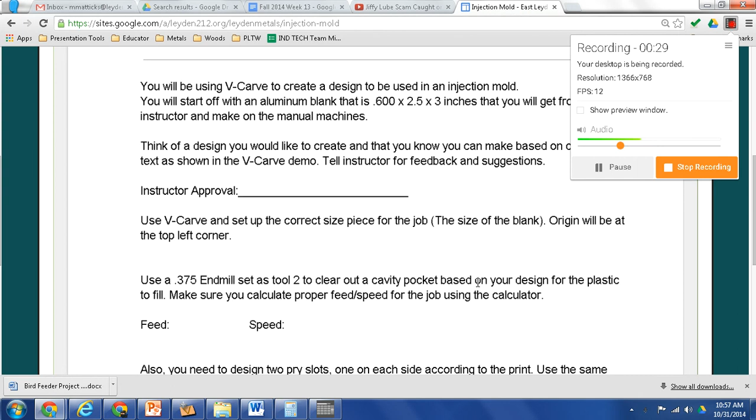And so I'm just going to show you how to create that real quick. And so if I come over to V-Carve and I have my blank set up, basically what I want to do is I want to create a pocket somewhere in the middle. Now keep in mind, if you think about where we're coming from here and we take a look at the actual final product, our pocket can't go all the way to the edges because we're going to have a couple of holes put in through there. So it's got to stay within this area, kind of in the center.

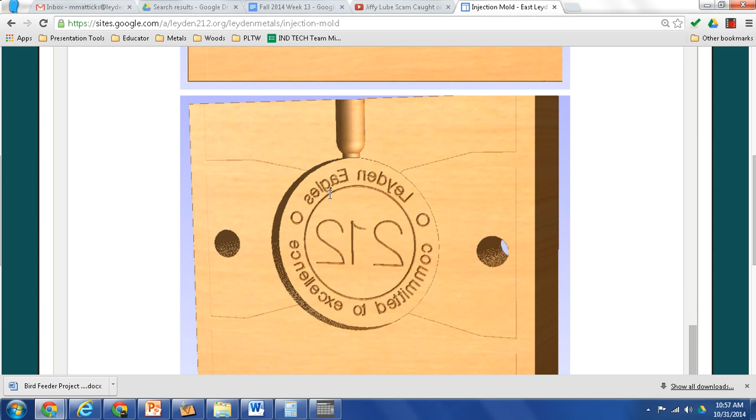So same thing here, you can kind of see that I have these holes. So I could have expanded a little bit more, but I have to stay clear of those by a decent amount. And so over here, basically it's telling me, okay, I want to make that pocket. So when I go into V-Carve, what I want to do is I want to give it a shape. And so let's say I want to make a rectangular pocket. Okay, so I'm going to draw a rectangle.

And right now it's going to ask me for an anchor point, meaning where is this rectangle going to start from? And then you can put an X and Y location. You can put a radius corner on there. What I'm mostly concerned about at this point is the size. So I have a 3 inch wide piece. So maybe my cavity is going to be 2.5. That'll give me 1/2 inch on either side. And I can play around with that a little bit later.

Okay, so I have 2.5, and then maybe my height is going to be only about 1.75 because I want to have room for that sprue and gate as well as some material on both sides. So I create that. Now, right now it's square. What you have to keep in mind is with a round cutter, like an end mill, these are never going to be square. It's always going to be radiused. And so if you want to just make it radiused, you can actually do radiused external right from here. And you can set it as a 1/4 inch radius.

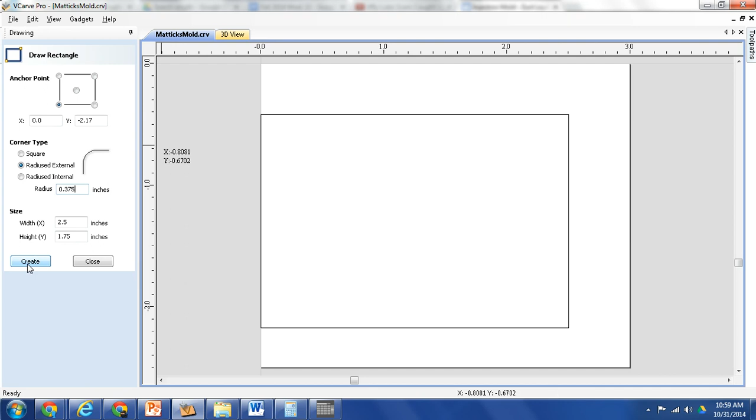In this case, since we're using a 3/8 end mill, you can't really do a 1/4 inch. You're going to do a .375 radius. So let's say that's what I wanted. So now it created another one on top of it. So I can just select that one. And then I just hit the delete button to get rid of anything, not the backspace, but delete. So now I have this shape right here. But what I really want is this shape to be centered in my mold.

And now I can double click it and you'll notice I can move it around. If I want to put it here, I can put it down here. I could actually change the size of it. So if I wanted it this big, like say I realize that it's a little too big or too small, I can always drag it to an appropriate size right there. If you just go over here to undo, you can always go back, you can go forward, you can edit undo, or if you're like me, I like to just do Control Z if I want to undo.

But for right now, maybe I want to keep this size right about here. Okay, so the shape of my pocket for my cavity is going to be like this. And so that's going to give me a little bit of room on this side for a hole, and then some gate and sprue up here, and then just some material left over here. If I want, I can make it a little bit longer. But now let's say I want this thing centered right in my mold. Okay, so I come over here and I come to my Align Objects menu. Really what you want to look at is I have a bunch of different operations I can do.

These are my file operations up here, like new, save, open, import an image, things like that. My control, my view, I can zoom, zoom out, zoom in. I can pan it around. Okay, over here I can create shapes. They're called vectors. Anything we carve has to be what's called a vector. I can edit my vector.

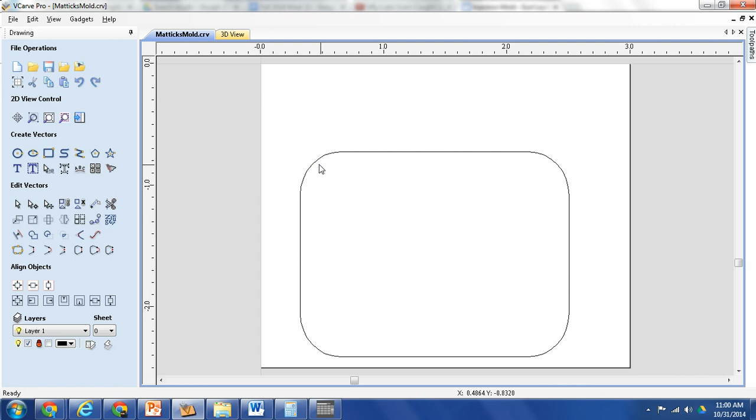So once I have it created, let's say I wanted to highlight this, I would come over here and highlight. All right, I could select it. I'll explain more of these more in depth a little bit later. But really what I want to do is align my object. And so I'm going to go ahead and I'm going to center in the material.

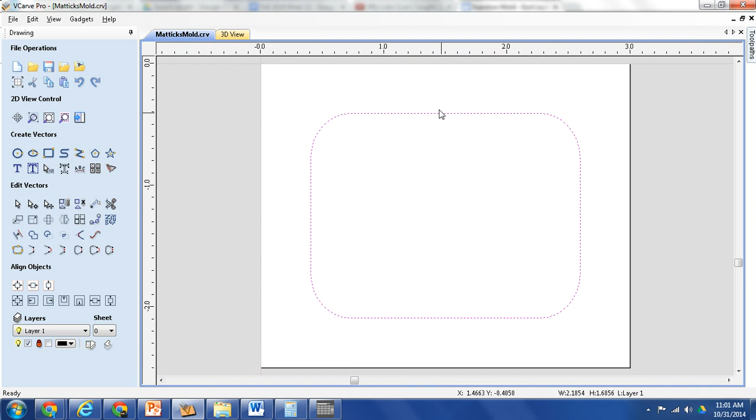Now that's okay, except I got to think about the overall shape of my project. And maybe in this case, I want it more towards the bottom, because if I go and look at where my sprue is, I want to have some room to have the injection happen. So in this case, I'm actually going to drag it down a little bit. Maybe that's how I want it, up and down. But I can always go and just center left and right and keep it centered in the x-axis.

So right now, I'm going to leave this alone. I'm going to kind of see how it goes. And so what I want to do at this point is I want to actually create a pocket for it to go. Because right now I've just drawn a shape. But let's say I want to really create a pocket. So in that case, anytime you want to actually cut something in the program and then have it generate into a code for the CNC, you come over to the toolpaths menu.

Now, when you hit the toolpaths menu, you're going to have a toolpath list of all the different operations. Right now I have none because I haven't assigned anything. And so if I take a look down here, I have a bunch of different toolpaths I can create. Now, right here, setup material, I've already done that, but that would kind of tell me, all right, I know it's this thick, which I already set up in the beginning. I could set my retract so it'll come above to a safe height, but that's already set. So I don't really need that right now.

I can do an engraving toolpath, which you guys will do coming up. I can do a profile toolpath, which you guys will use in other projects where you actually cut around the outside of this shape or around the inside of this shape, but you're not actually clearing it away like we're going to do right now for a cavity. So in our case, you can also do drilling, you can do some texturing, text, quick engraving, things like that. But really right now I want to do a pocket. And so I'm going to hit pocket.

And once you select a toolpath, it's going to come up with a menu. Just like when we set up the material before, you're going to go from top to bottom. And so right now my start depth, I'm going to go ahead and say is 0 inches because I'm going to start right at the top of the part. Now my cut depth, I do want to change or make sure that it's good. Now our cavity is only going to be about 1/8 of an inch thick. 1/8 of an inch is 0.125. So that's how far down you're going to go.

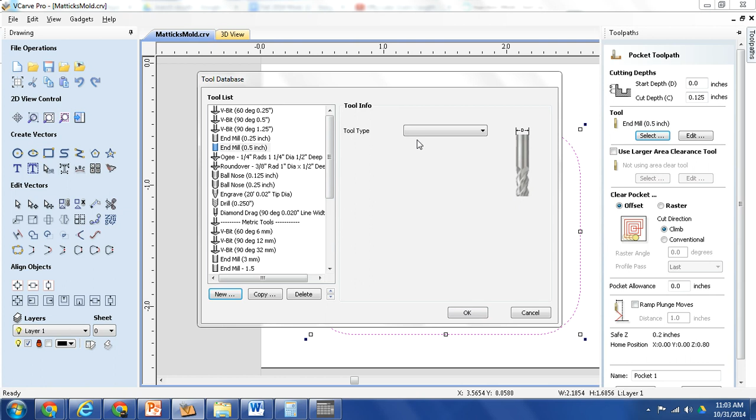And so I'm going to go right ahead and I'm going to create new. I'm going to select an end mill. Now in this case, I'm going to tell the diameter is 0.375. Okay, and then my pass depth, it says it's 1/8 of an inch. That means how much it will take at one time.

Now that's going to be too much for me. If you guys remember from everything we've done, I'm only going to take 50 thousandths of an inch at once. Now if we come down here, you're going to see the speeds and feeds that you guys should start to be familiar with. And so right now it's set at 12,000 RPM, which I'll tell you immediately is too fast because our machines can only go 6,000 RPM.

But if you guys use your calculator from the G-Wizard, I can come right over here. If you just select mini mill, feeds and speeds menu, Haas mini mill now instead of the lathe, aluminum material. Okay, we're using a high-speed steel end mill. And basically I tell it the diameter. So let's say I started off at 0.5, I'm going to change it to 0.375, and you're going to see a bunch of different things happen down here. So when I hit down, it changes all these parameters.

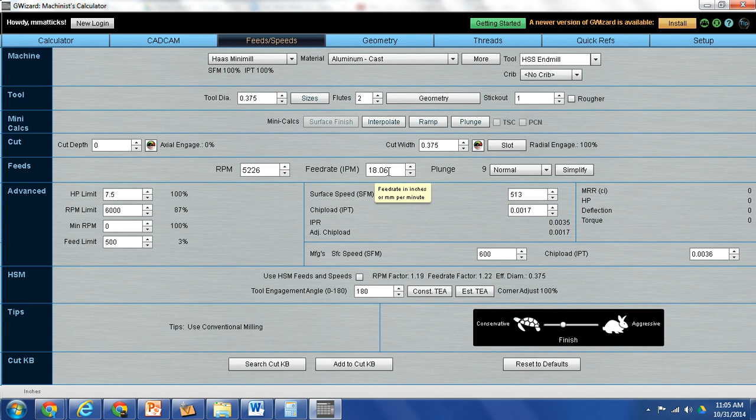What I'm mostly concerned about is my RPM and my feed rate. Now you may be set at a more aggressive cut. We're going to keep it a little bit more conservative. So I want you to go to where it says finish, and it's going to tell me that I should set my RPM to 5226 and my feed rate to 18.06. And so I'm going to go back to my program and put that in. Now 5226, I can just go ahead and say 5,500 if I want. Just round up. A couple hundred RPM doesn't make a difference.

My feed rate is going to be 20, okay, because over here it told me that I should have 18. I bumped up my RPM just a little bit, so 20 inches a minute is fine. I'm also going to change my plunge to only 20, meaning how fast it'll go down. I want to make sure this is set at inches per minute. Okay, that's the correct setting for our machines.

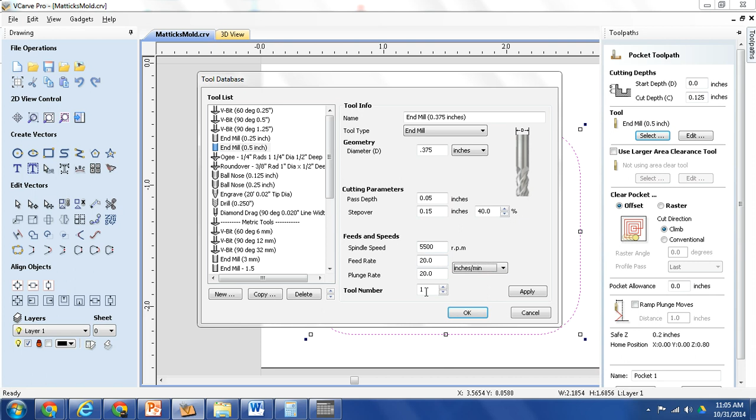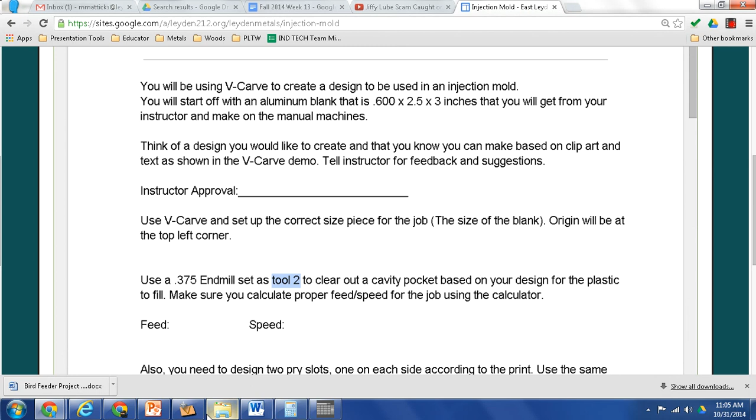And now as far as the tool number goes, if you read, it'll tell you that we're going to use our 3/8 end mill set as tool 2 right here. And so I'm going to set that as tool number 2. And so now I can hit OK. And now when I look over on my tool path, it's going to say 0.375 inches. I'm good there. If I were to edit this, it would have all the parameters I just set. Okay, so I'm still good there.

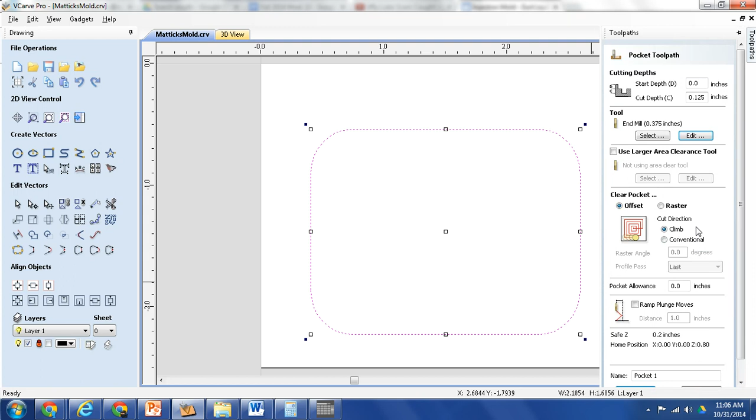Now I come in over here. Most of this is going to be pretty good. We're going to leave it as an offset path. You can do raster where it goes back and forth, but not for this type of shape. Okay, now I just have to calculate. Anytime you come back and edit this to change some things, you have to calculate the tool path. And so in this case, I'm going to change the name to cavity, because that's what it's going to be, and I'm going to calculate.

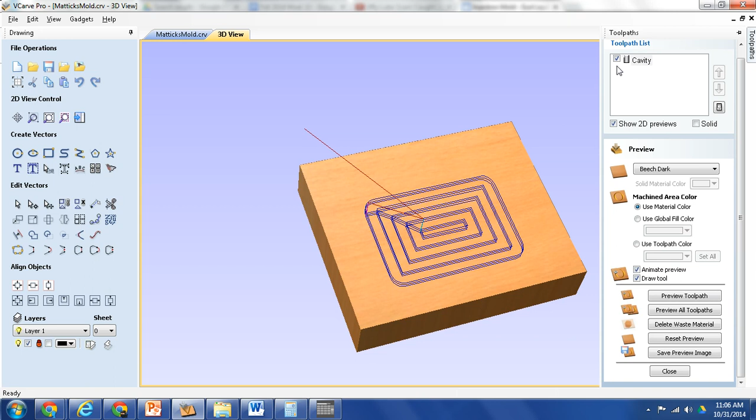And now it brings up a preview right here of the actual toolpath and what it may look like. However, if I go back into my toolpath tab, it's now come to a preview menu, and I can select my cavity toolpath, which is now up here since I created it, and I can preview the toolpath, and it shows me what it's going to do. It's going to cut that pocket out in 50 thousandths increments until it gets to 0.125. And so it's showing me that simulation right now.

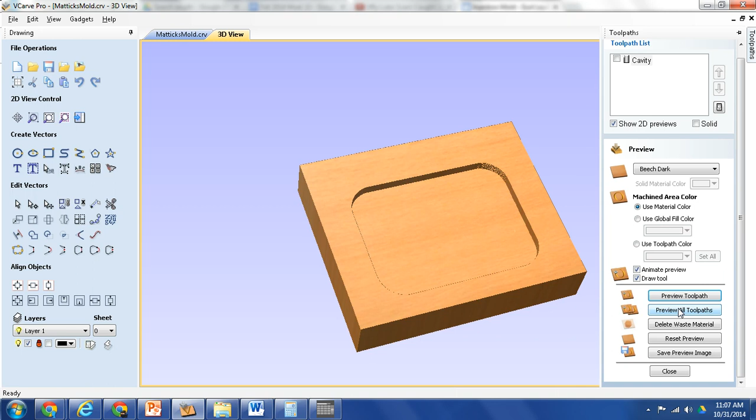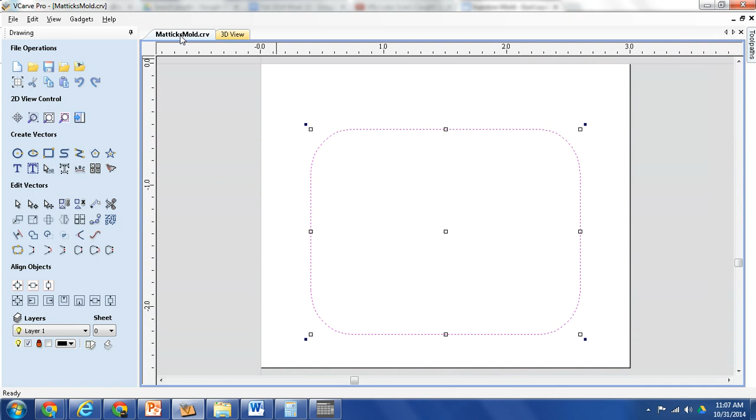Okay, and so right there, I can take a look. I can see that it's cut out that shape for me. Everything's good. At this point, it would be a good idea to save. I've already saved it, so I just hit save. It automatically saves. And now I can go back and start to work on my next features. So I do my cavity, I simulate it in the 3D view, and now I have to come back and draw my next stuff in the drawing view.